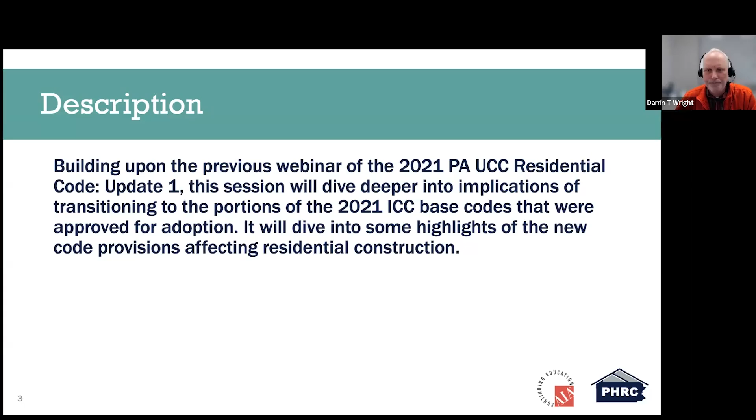These are the basics of the learning objectives: review the most efficient ways to find out which code provisions have changed between 2018 and 2021, discuss noteworthy and substantial code provision changes that will impact design costs and occupant safety, dive deeper into various code changes that will affect residential construction, and understand available resources on best practices that may be impacted by code changes, specifically focusing on building enclosure.

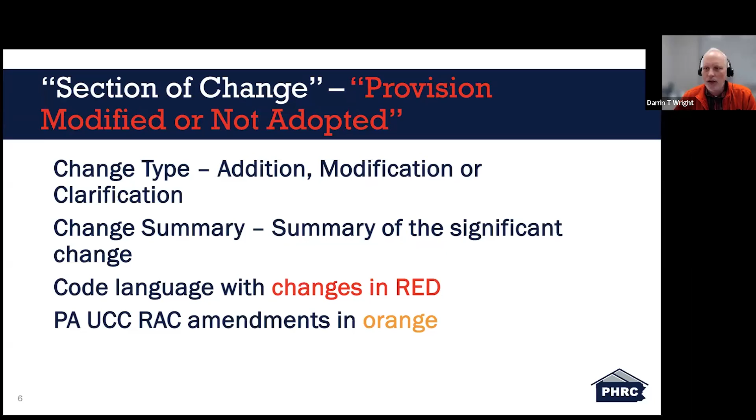And how will these changes be presented? Section of change, there's provisions modified or not adopted. We'll talk about that as we go through the slides. There's three basic change types: addition, modification, or clarification. And within the slides, you'll see a change summary, the summary of the significant change. And there's code language with changes in red. And you're also going to see PA UCC RAC amendments, which we also included when they're applicable to what we're talking about, in orange.

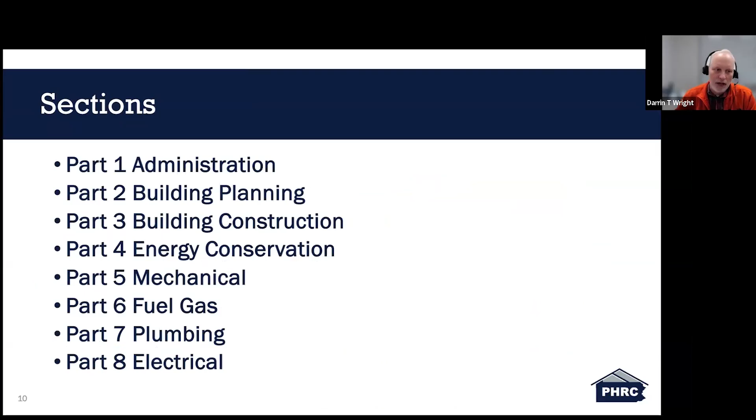Again, today's information is coming directly out of the significant changes to the IRC, the 2021 edition. And additional information is also taken out of the PA UCC 2021 International Code adoption. Sections are broken down into about 8 parts: administration, building planning, building construction, energy conservation, mechanical, fuel gas, plumbing, and electrical. We're going to start with administration.

The first thing in administration we'll talk about is R202, the definition of emergency escape and rescue openings. This change type is a clarification. As you can see, the change summary states definitions for emergency escape and rescue openings and grade floor openings have been updated for clarification and to be consistent with the IBC. What it's saying is the 2021 IRC includes provisions for emergency escape and rescue, which have been updated for consistency with the IBC. Key changes involve clarifying the definition of measurements for the maximum height of emergency escape openings and grade floor openings.

Previously, the measurement for sill height was ambiguous, but the 2021 code clearly specifies that it should be taken to the lowest point of the opening, not necessarily a windowsill. Additionally, the definition of grade floor opening has been revised to better explain the connection to emergency escape and rescue openings. This provision addresses confusion around the reduced opening area for emergency escape at grade and clarifies that the exception applies only to openings close to grade, not those deeper than 44 inches below grade. These updates aim to make the provision more understandable and applicable.

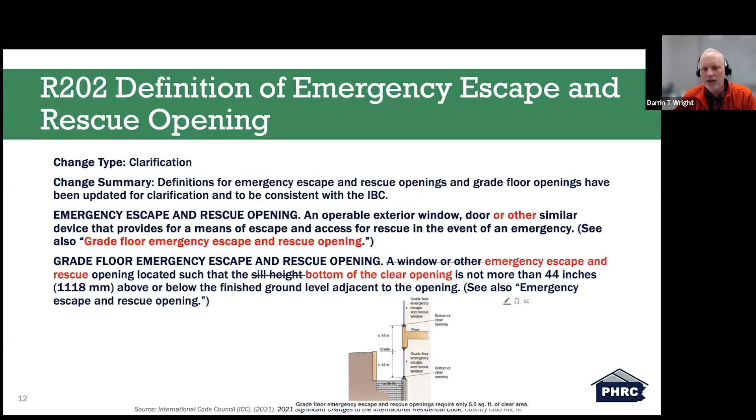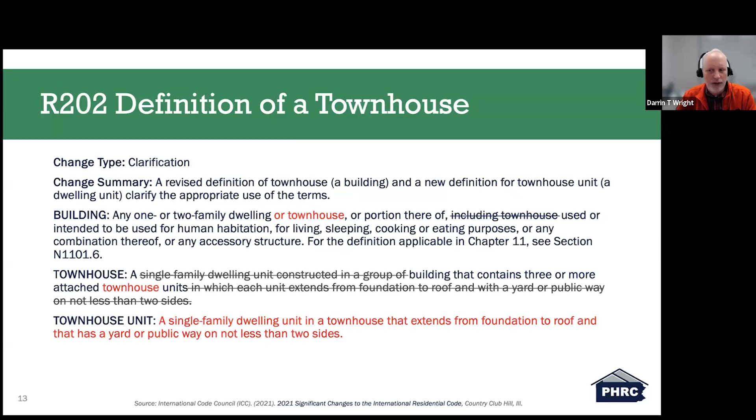And the second slide in administration is R202, the definition of a townhouse. Again, this is a clarification, including all units. The new definition clarifies that a townhouse unit is an individual single-family dwelling within a townhouse building, and a townhouse building consists of 3 or more units. This change ensures consistency across the code, including the townhouse provisions of section R302.2. Additionally, the definition of building has been updated to specify including townhouses along with 1- and 2-family dwellings and accessory structures.

Going into building planning, R301.3 is story heights. And this change type is a clarification. And the change summary states maximum story height for wood wall framing is 13 feet 7 inches when the exception requirements are met. What they're saying is the 2021 IRC revised section R301.3 to address previous confusion

surrounding story height provisions. Historically, the code allowed wood frame buildings to have bearing wall stud heights of up to 10 feet, with exceptions permitting up to 12 feet if an engineered design was provided for wall bracing, except for wind and seismic loads. The 2009 and 15 provisions attempted to address issues with the 16-inch maximum floor framing depth and story height limits, but led to conflicting provisions with wall bracing and masonry walls.

The 2021 update restores the 12-foot bearing wall stud height exception without requiring engineering, as long as compliance with wall bracing requirements in section R602.10 is met. This clarification resolves conflicts with previous story height limits and wall bracing provisions while maintaining engineering requirements for taller walls not complying with certain exceptions in section R602.3.1.

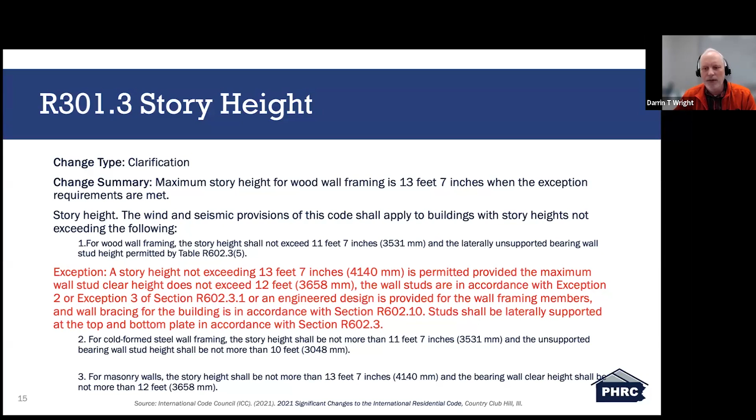The revised code also provides specific snow load limits for taller studs in certain regions, ensuring balance between structural integrity and safety. So this is a 2-slide part. And I'm just going to keep going on from here.

R302.2, this addresses townhouses. This is a modification. The change summary: common walls separating townhouses are permitted to terminate at the inside of the exterior walls where the prescribed fire blocking is provided. Okay, R302.2 has been updated to clarify fire resistance separation requirements for townhouse units. A townhouse unit is defined as a building with 3 or more dwelling units, each called a townhouse unit.

As we talked about earlier, fire separation can use either 2 1-hour rated walls or a common wall with a 1-hour rating and sprinklers, or 2-hour rating without sprinklers. The common wall must extend to the exterior wall sheathing unless an exception applies requiring specific fire blocking materials. The structural independence for separation walls is generally required, but sprinklers can provide an exception.

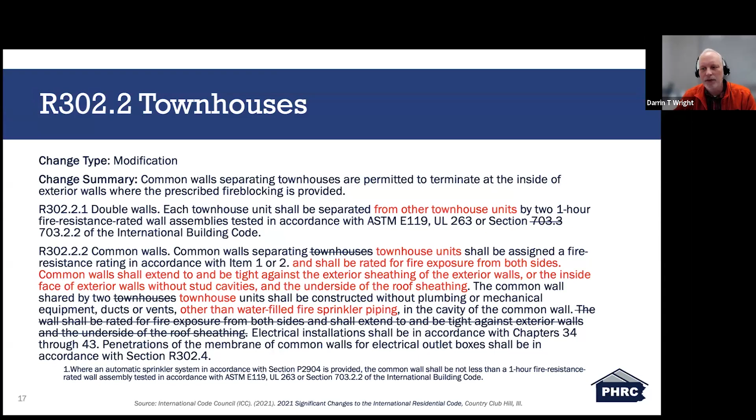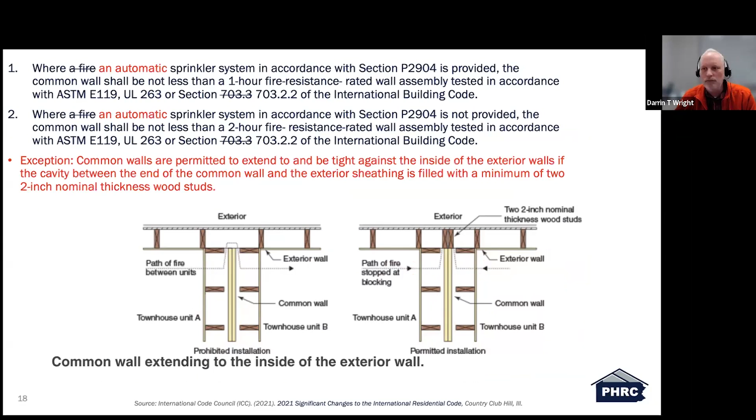R302.3, 2-family dwelling separations is a modification. The prescribed fire resistance rating separation between 2 dwelling units in a single building is not affected by the presence of a lot line between the units. That's what the summary states. The updated code clarifies fire separation requirements for 2-family dwellings, duplexes, regardless of whether a lot line exists between the units.

Only a 1-hour fire-resistant rated wall is required. This resolves previous debates where some jurisdictions treated the lot line as a required 2-hour wall or considered the units as separate single-family dwellings. The change aligns duplex provisions with townhouse rules, ensuring consistency and eliminating confusion.

Okay, R302.5, dwelling garage opening protection. This is a clarification, and there is an addition to the PA UCC RAC change. This change summary: doors between the garage and residence must be self-latching. The IRC requires basic fire protection between an attached garage and the dwelling, typically achieved with 1/2-inch gypsum board on the garage side. While not fire resistant rated, this barrier slows fire spread.

Garage to house doors must meet specific thicknesses or a 20-minute rating, introduced in 2012 to prevent fire, toxic fumes, and carbon monoxide from entering the home. Doors between the garage and home must now include self-closing devices. These devices, like spring-loaded hinges, enhance safety alongside smoke and carbon monoxide alarms.

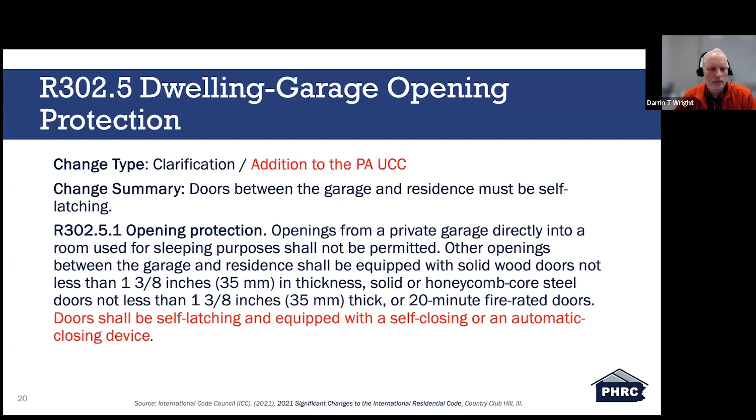R303.1 mechanical ventilation. This change type is a clarification. The summary states a local exhaust system is an acceptable substitute for natural ventilation in kitchens. And again, prior to 2012, the IRC provided an option for 0.35 ACH or whole house mechanical ventilation systems where the prescribed natural ventilation was not provided. The 2012 change eliminated the first option.

The 2021 IRC reintroduces the option for room-based mechanical ventilation systems providing 0.35 air changes per hour, offering flexibility for additions or remodels. It also clarifies that local exhaust systems such as kitchen range hoods can replace natural ventilation in kitchens to effectively remove cooking pollutants. This change emphasizes the need for ventilation directly at the source in kitchens, aligning with Chapter 15 provisions.

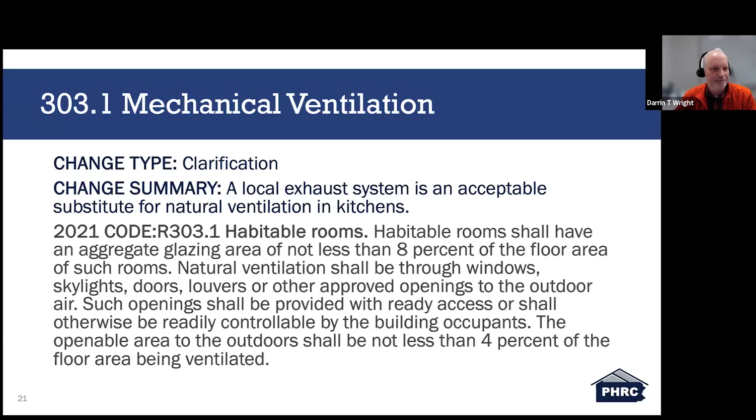R305.1, ceiling height RAC modification. This is a modification. Change summary: the minimum ceiling height is reduced to 6 feet 6 inches under beams spaced at least 36 inches apart. And again, ceiling heights: the intent of the language in the code is to allow beams to project from the ceiling, such that the base of the beam is at least 6 feet 6 inches above the floor. The minimum finish to finish horizontal dimension between the beams is 36 inches.

The exception would not be applicable to basements, as the code already permits a ceiling height reduced to 6 feet 4 inches for beams, girders, ductwork, in basements. The new exception is a result of concern expressed that the size of the beams and girders has increased in recent years with the advent of engineered lumber and open floor plans, and that a ceiling height of 7 feet was not always achievable.

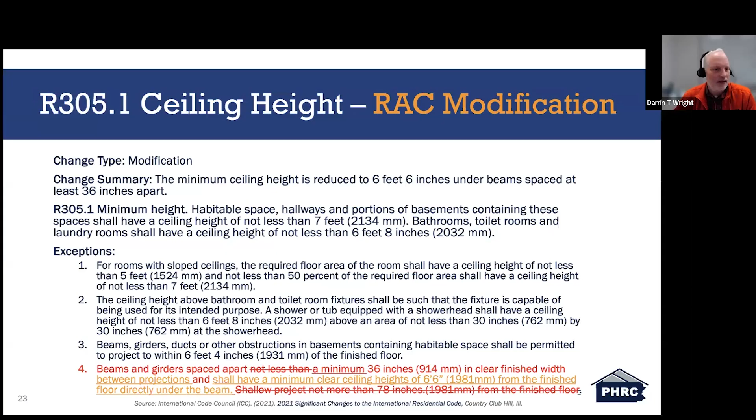The height of 6 feet 6 inches was chosen based on the clear height dimensions of the one required egress door measured from the threshold to the underside of the head stop. The code does not regulate the dimensions of the other doors in the house, but typically they maintain a clear height exceeding 6 feet 6 inches. And we've included a diagram within your slides, your handouts.

R308.4.5, glazing and wet surfaces. This is just a clarification. The language that addresses glazing in walls, enclosures, or fences near tubs, showers, and swimming pools has replaced the word facing with the words adjacent to for those elements related to wet surfaces. Basically, the IRC requires safety glazing near tubs, showers, and swimming pools to reduce the risk of injury from slips and falls on wet surfaces.

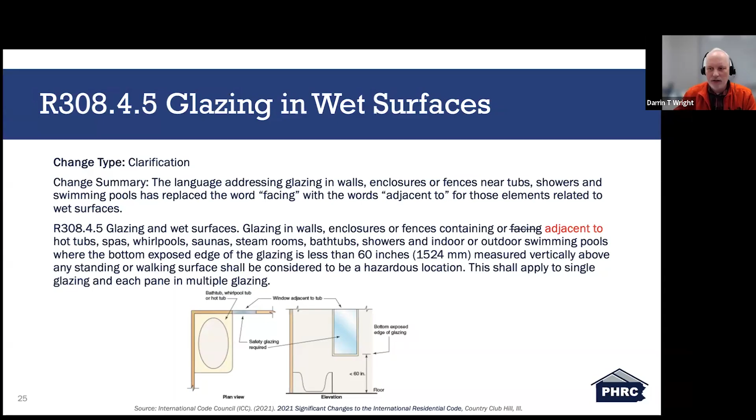Historically, there has been confusion around how to apply the 60-inch horizontal safety zone around these fixtures. Some interpreted the rule to apply only to glazing directly facing the fixture, while others included all glazing within the 60-inch zone, regardless of orientation. To clarify, the updated code now uses the term adjacent to describe glazing near these fixtures, aligning with the language used for glazing near stair landings. This change ensures that safety glazing protects against falls in any direction within the slippery 60-inch zone, providing clear and more consistent guidance.

Moving on to R310.1, emergency escape and rescue opening requirement. This also includes a RAC modification in orange. Again, this change type is a clarification in the code book. The change summary states emergency escape and rescue openings require a clear 36-inch path to a public way. Operation requirements have been clarified. Emergency escape and rescue openings are critical safety features in the IRC, providing secondary exits in emergencies. These openings have been required in sleeping rooms and, since the 2006 code, in all basements and habitable spaces.

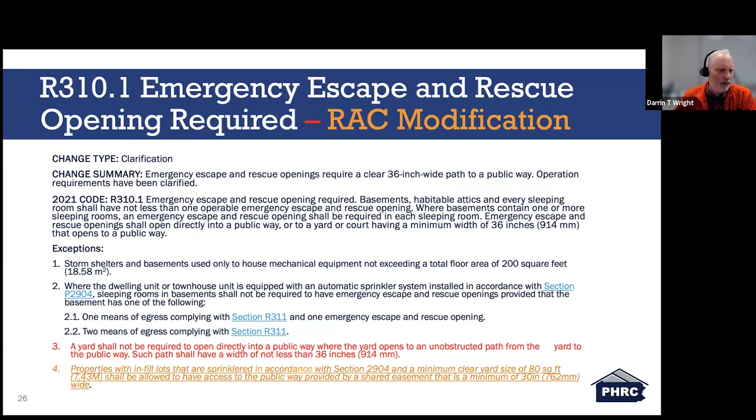The 2021 code introduces a new requirement for a 36-inch wide path from the opening to the public way, ensuring safe travel during an emergency. Additionally, it clarifies that emergency escape windows can use fall prevention devices that meet ASTM F2090 standards, with the release mechanism not exceeding 70 inches above the floor. These changes ensure safe and effective means of escape, particularly for children near high windows. And exception 4 was added through a RAC modification.

R310.2, emergency escape and rescue openings. It's a modification. And the change summary states emergency escape openings under decks, porches, and cantilevers require a path not less than 36 inches wide. Opening dimensions have also been clarified. The 2021 IRC update to section R310.2 mainly involves editorial and organizational changes. The minimum clear opening area of 5.7 square feet and dimensions for emergency escape windows are now clearly separated.

The exception for grade floor openings has been clarified to apply only to openings meeting the new definition of grade floor emergency escape and rescue opening. Additionally, the code now measures window opening height from the floor to the clear opening, eliminating references to sills. Another change allows emergency escape openings under floor cantilevers, requiring a 36-inch minimum path width to the yard, along with the existing 36-inch height requirements for paths under decks and porches.

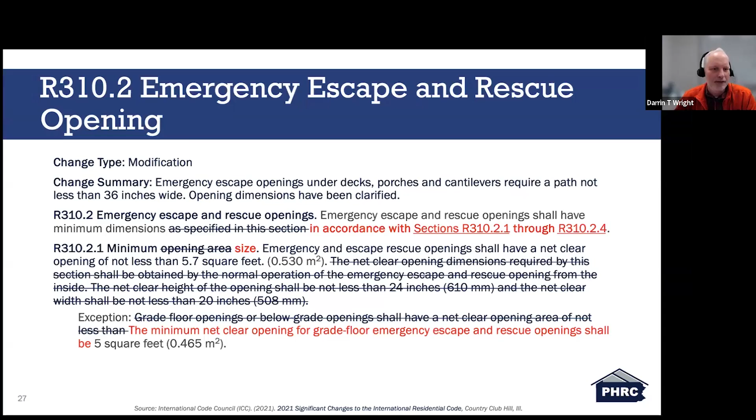R310.5, replacement windows for emergency escape and rescue openings. This is a modification. The change summary states opening dimensions have been reduced for emergency escape and rescue openings for a basement remodel, basement addition, and for a change of occupancy. Again, the 2021 IRC has reorganized and clarified provisions for emergency escape and rescue openings. Section R310.5 now focuses on replacement windows in existing dwellings, requiring that replacement windows be no less safe than the existing ones, and to be the largest standard size window that fits within the existing opening.

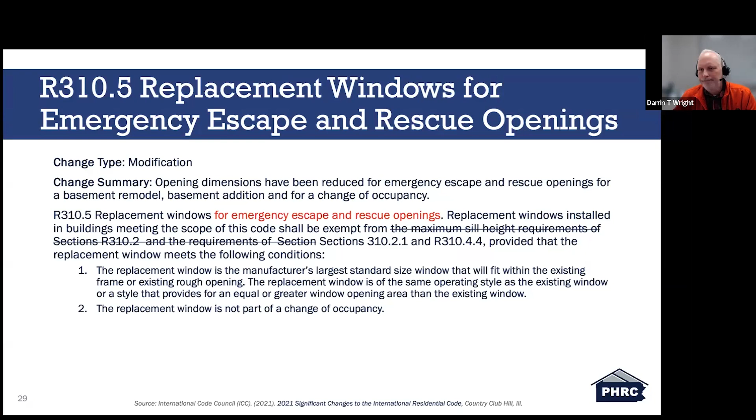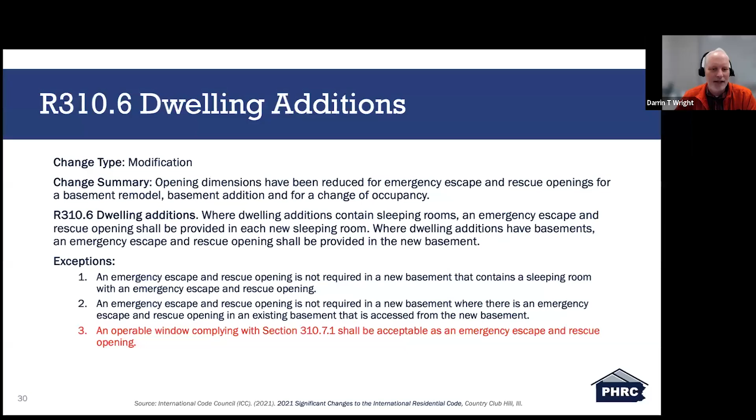R310.6, this is dwelling additions, and this change type is a modification, and the change summary states opening dimensions have been reduced for emergency escape and rescue openings for a basement remodel, basement addition, and for a change of occupancy. R310.6 retains requirements for emergency escape openings in new bedrooms and basements in dwelling additions, with a new exception allowing a reduced window size for certain cases, and really it just adds the exception that an operable window complying with section R310.7.1 shall be acceptable as an emergency escape and rescue opening.

R310.7, alterations or repairs of existing basements. This is a modification. The change summary states opening dimensions have been reduced for emergency escape and rescue openings for a basement remodel, basement addition, and for a change of occupancy. R310.7 clarifies that only new sleeping rooms and existing basements require an emergency escape opening, and a new exception permits smaller window openings for existing windows in these rooms.

R310.7.1, existing emergency escape and rescue openings. This is a modification. And again, the change summary states opening dimensions have been reduced for emergency escape and rescue openings for a basement remodel, basement addition, and for a change of occupancy. And R310.7.1 further addresses reduced window sizes for changes in occupancy, providing flexibility in emergency escape and rescue opening requirements in specific scenarios, aligning with provisions from the IEBC.

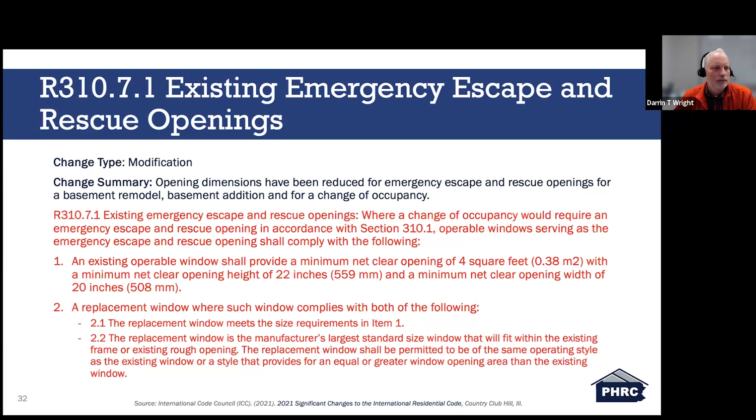R312.2.1, window opening heights. This is just a clarification. The revised language clarifies that measurements for determining the need for fall protection are taken to the bottom of the clear opening of the window. Again, these provisions will apply to windows with openings above 72 inches in height, where the minimum opening height above the finished floor is set at 24 inches unless other protection like an opening control device is provided.

The measurement method for this requirement has changed over time. Initially, the measurements were taken to the window opening, and in the 2015 edition, they were taken to the windowsill. And in the 2021 edition, the reference to the windowsill has been removed, and the measurements are now taken to the bottom of the clear window opening.

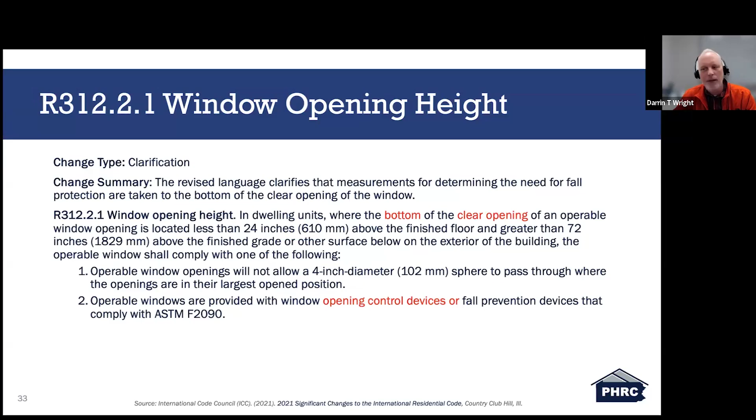R314.3 smoke alarm locations. This is a modification. A new location requirement for smoke alarms addresses high ceilings adjacent to hallways serving the bedrooms. And the 2021 IRC introduces updates to smoke alarm placement requirements to improve safety and reduce nuisance alarms. Smoke alarms are still required in each bedroom, adjacent areas, and on each level, with the exception for open split level designs where a smoke alarm on the upper level serves both levels.

However, in homes with a hallway leading to bedrooms that open into a great room with a higher ceiling, a new requirement mandates an additional smoke alarm on the upper ceiling if it is more than 24 inches above the hall ceiling, ensuring faster detection of the smoke.

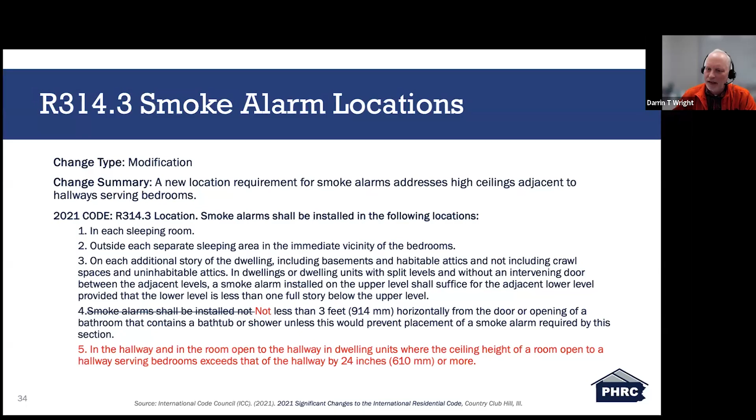The 2015 IRC already addressed nuisance alarms by requiring smoke alarms to be placed a certain distance from cooking appliances and bathrooms. The new code also allows photoelectric smoke alarms to be installed as close as 6 feet from cooking appliances, reducing the risk of false alarms, while smoke alarms listed under the new UL 217 standards are specifically designed to resist nuisance alarms from cooking. And this is just a diagram section drawing of the placement of the new alarm.

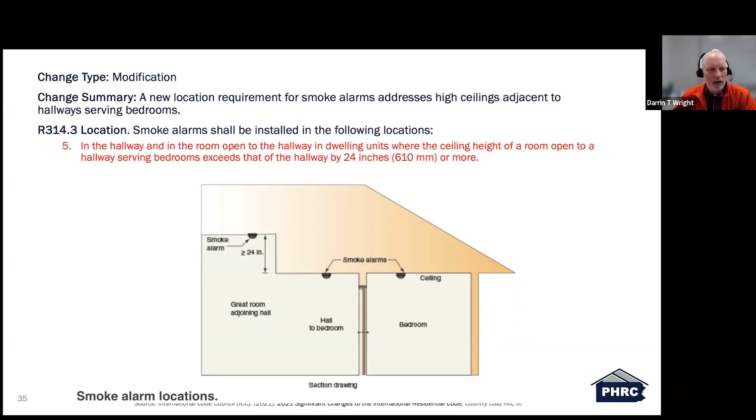R315.2.2 carbon monoxide alarms. This is a modification. Repairs to an existing fuel-fired mechanical system now trigger the retroactive requirements for carbon monoxide alarms. And the 2021 IRC update specifies that alterations or repairs to mechanical systems are exempt from these requirements only if they do not involve fuel-fired equipment. This change ensures that all fuel burning systems such as forced air units or water heaters are subject to the carbon monoxide alarm provisions when altered or repaired.

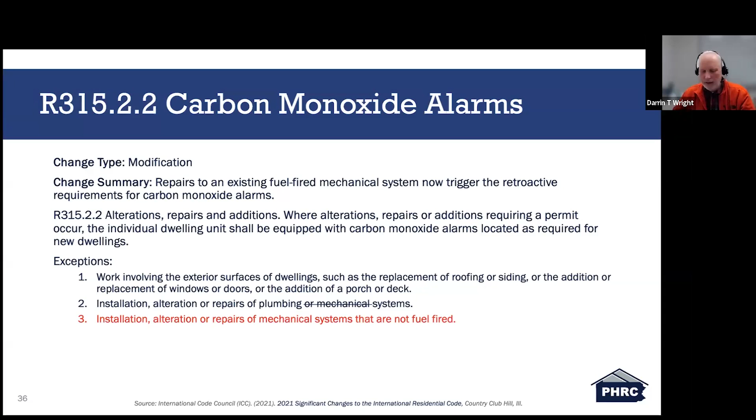R320 accessibility. This change type is a modification, and the change summary states the accessibility provisions for live-work units and owner-occupied lodging houses constructed under the IRC are now clarified. The 2021 IRC update clarifies the definition of live-work units in townhouses and owner-occupied lodging houses with no more than 5 sleeping units, like a bed and breakfast, removing confusing language.

Additionally, the code strengthens the link to the IBC by specifying that the non-residential part of live-work units must be accessible, and where there are 4 or more such units, the dwelling portions must comply with IBC accessibility provisions, though multi-level units without elevators are still exempt, meaning that in most cases, townhouses are exempt from the accessibility requirements.

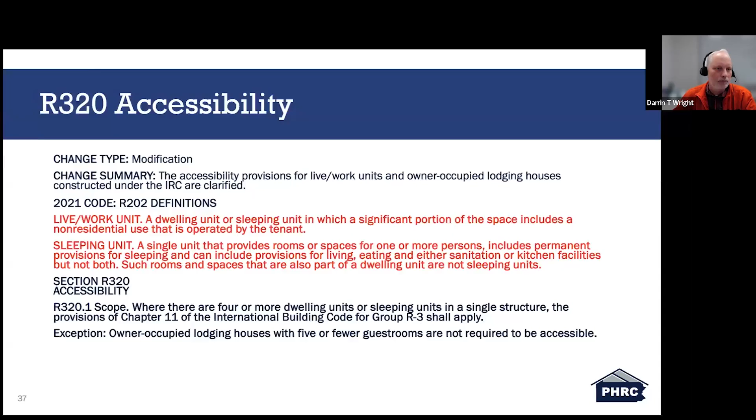R323 storm shelters, change type, this is an addition. Added guidance on the design of storm shelters is placed in section R323. The 2021 IRC introduces provisions aimed at ensuring the safety and effectiveness of residential storm shelters. Failures in shelters that did not meet the ICC 500 standard for storm shelters highlighted the importance of proper design and construction. Shelters placed above ground without accounting for tornado or hurricane loads were particularly prone to failure.

To address this, section R323.1 mandates that storm shelters comply with ICC 500, requiring shelters to be engineered and certified by a registered design professional. The code also adds a definition of storm shelters and requires sealed plans for structural and impact protection systems. An exception allows listed and labeled shelter designs which have undergone third-party review to be submitted without individual design.

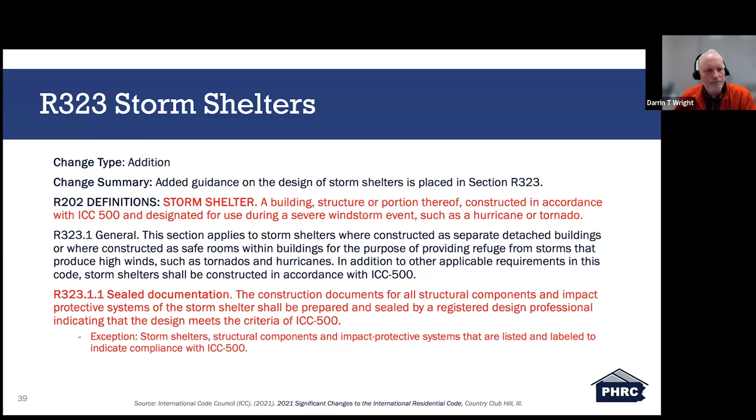Footings below light frame construction. This is a modification. The change summary: tables R403.1, 2 and 3 are revised to more accurately reflect the current practice. Again, the 2021 IRC revises the minimum width and thickness requirements for concrete footings outlined in tables R403.1, 2, and 3, introduced in the 2015 edition.

These changes address discrepancies between the footing widths required by the tables and those suggested by engineering analysis, which found some widths are unnecessarily wide due to conservative assumptions. Key revisions include ground snow loads instead of roof snow load, adjusting the load for above grade concrete or masonry walls from 100 PSF to 55 PSF, and applying more accurate load combinations for roof, snow, and floor live loads.

Additionally, the revised calculations clarify the use of tributary widths for footing design, eliminating the confusion caused by previous guidelines that stated footing widths for wider buildings. These updates generally align with historic practices while ensuring technical accuracy. A new structure for footnotes further clarifies how to adjust footing widths and depths based on building width, especially for buildings wider than 32 feet.

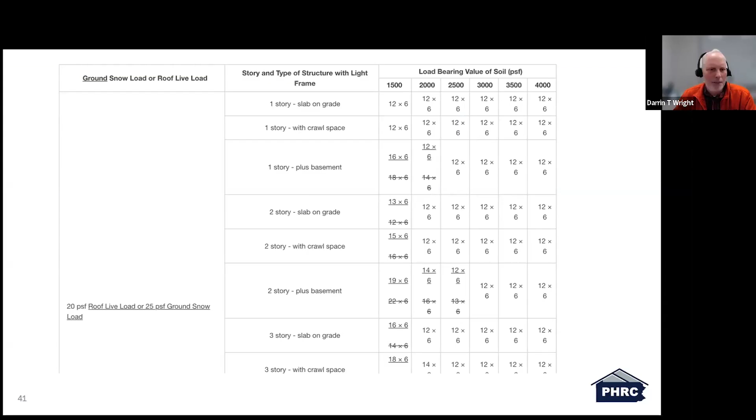And if you go to the new code book, you will see there's a lot of strikeouts, and most of the footer widths are narrower. Not by a lot, by a few inches.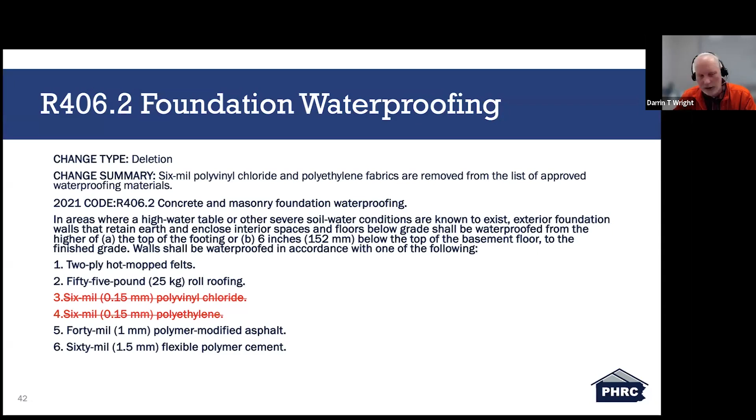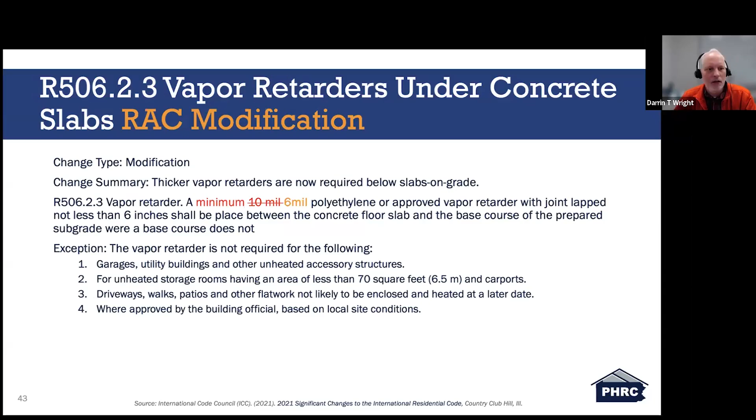R506.2.3, vapor retarders under concrete slabs. This actually is a RAC modification I wanted to include. Thicker vapor retarders are now required below slabs. That's the change summary in the code book. And their code change was moving the minimum thickness to 10 mil, but the RAC modification canceled that 10 mil modification and kept it at 6 mil polyethylene for approved vapor retarder. So you could still use 6 mil under slabs, even though in the IRC book it says 10 mil.

R507 deck loads. This change type is a modification. The change summary: deck design is now based on live and snow loads. The 2021 IRC updates deck design provisions to account for areas with higher snow loads. The PHRC is going to be having a webinar in January. This webinar will be presented by Chris Hine, and he will be presenting on deck design and modification.

So previously, all decks were designed with a uniform 40 PSF live and a 10 PSF dead load. However, the new code requires decks to be designed to either 40 PSF live load or a ground snow load, whichever is higher based on your area or jurisdiction. This ensures that deck structures are adequately designed to handle local snow loads. And again, there are now 4 tables, the 40 PSF tables, and then there's a 50, 60, and 70 table as well.

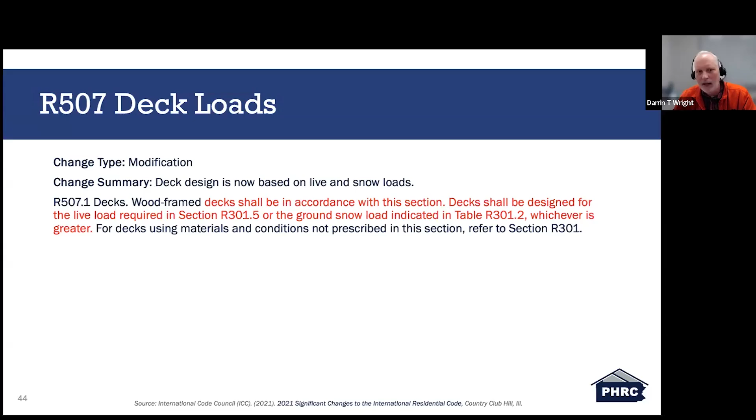R507.3 deck footings, this is a modification. Again, clarifications are made for freestanding deck footing exceptions, and a tributary area of 5 square feet is added to the deck footing size table. The 2021 IRC clarifies footing exceptions for freestanding decks. Joists supported directly on grade no longer require footings, and small decks low to the ground can use concrete piers to support deck joists without the need for beams or posts. These decks are limited to 200 square feet and a height of 20 inches above grade.

Table R507.3.1 now offers a smaller minimum footing size for decks. This change makes footing requirements more appropriate for smaller areas like stairs or landings and allows for precast concrete solutions. Updated footnotes clarify that footings must be large enough for full post bearing and specify that a minimum footing thickness applies to plain concrete, with reinforced footings potentially being allowed based on calculations.

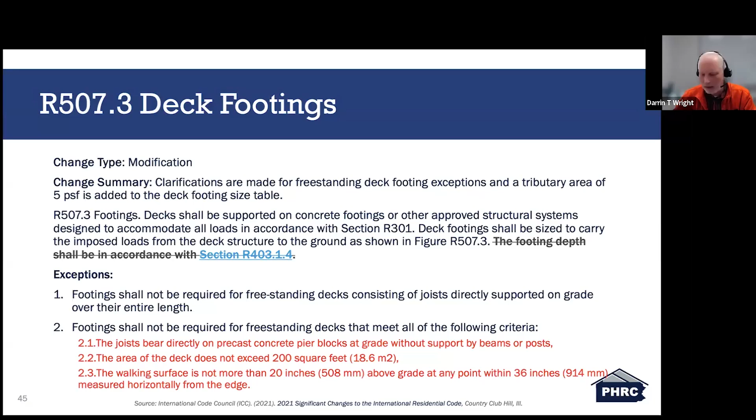R507.4 deck posts. This is a modification. The change summary states the deck post height table is expanded by adding the tributary area supported by a post and the wood species for determination of a maximum post height. And again, R507.4 maximum deck post height has been significantly expanded in the 2021 IRC to accommodate a broader range of post heights by considering the tributary area supported by the post for smaller decks, porches, and landings.

This expansion allows 4x4 and 4x6 posts to support greater heights, with the maximum post height now reaching 14 feet for posts with an 8x8 minimum nominal dimension, or a maximum tributary area of 20 square feet. For decks with a 40 PSF live load, certain wood species such as southern pine, Douglas fir, hem fir, and spruce pine fir with 6x6 minimum dimensions can support the 14-foot height. The table accounts for 50, 60, and 70 PSF ground snow loads and standard wood assumptions.

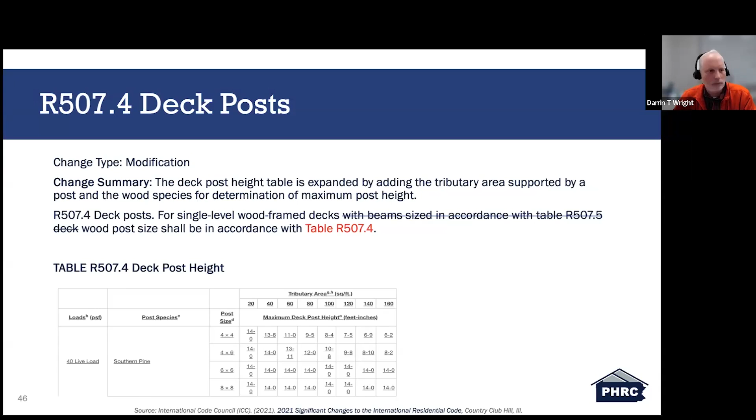R507.5 deck beams. This is a modification. The change summary states the deck beam span table is split into multiple tables, providing spans for a given deck, live, or snow loads, single and multiply spans, as well as options for support of the cantilever decks. Cantilever deck joists are listed.

Okay, moving on, 507.5 deck beams. Change type is a modification. The change summary states the deck beam span table is split into multiple tables, providing spans for a given deck, live, or snow loads, single and multiply spans, as well as options for support of the cantilever deck joists are listed.

And again, to address the snow loads greater than 40 PSF, the 21 IRC updates prescriptive deck provisions with revised span tables. The table R507.5 deck beam span length is replaced by 4 new tables, R507.5(1) through (4), that account for 50, 60, and 70 PSF ground snow load conditions in addition to the traditional 40 PSF. These tables now list single ply spans for all wood species, with multiply span options still available for each species.

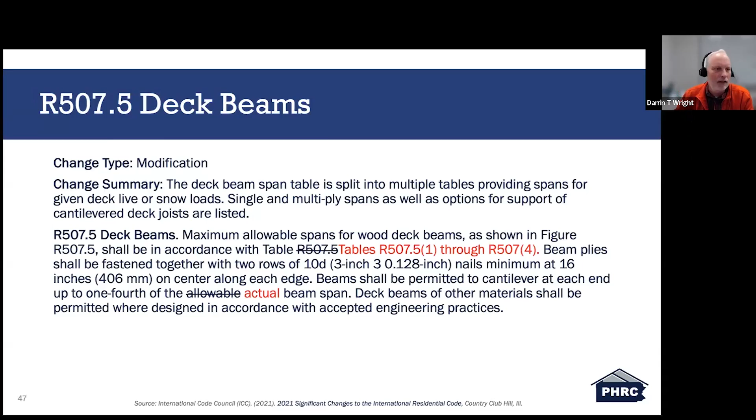And several examples are provided to illustrate the effective joist spans in the 2021 IRC. And they are included in your handouts as well as here, but I'm not going to go over these.

I'm going to move on to R507.6 deck joists. This change type is a modification. Change summary: deck joist options are added for decks with large ground snow loads. Cantilever spans are now specifically based on maximum joist span. And the 2021 IRC updates table 507.6, which previously caused confusion regarding cantilever lengths for deck joists.

And the 2018 IRC cantilever limits were based on joist spacing and required designers to check both the maximum cantilever lengths and the limit of 1/4 of the joist span, which was often unclear. The new table uses backspan to define the actual joist span, making the maximum cantilever length more intuitive.

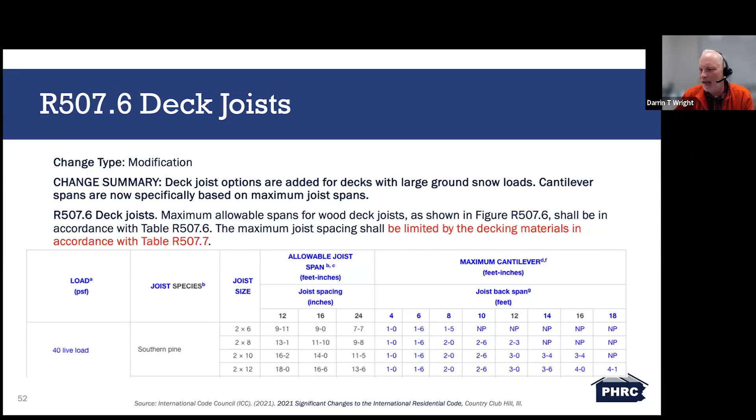Moving on to R507.7, the decking. This is a modification. The wood decking table is updated to show maximum on-center joist spacing for single and multi-span configurations. The 2021 IRC updates table 507.7, which addresses the maximum joist span for decking, particularly for 2-inch nominal wood decking material.

The previous 2018 IRC table was conservative, recommending a maximum span of 16 inches, whereas the American Lumber Standard Committee decking policy allows for a span of up to 24 inches for certain 2-inch nominal materials. The updated table retains a conservative baseline but offers greater flexibility for design and manufacturers by considering whether decking spans 2 or more joists.

In a multi-span condition where decking spans across multiple joists, the allowable joist spacing may increase, especially for thin and flexible decking materials. Additionally, footnote B provides flexibility for 5/4 thick wood decking, allowing a lumber grading agency or a third-party inspector to determine the maximum joist span for specific decking materials.

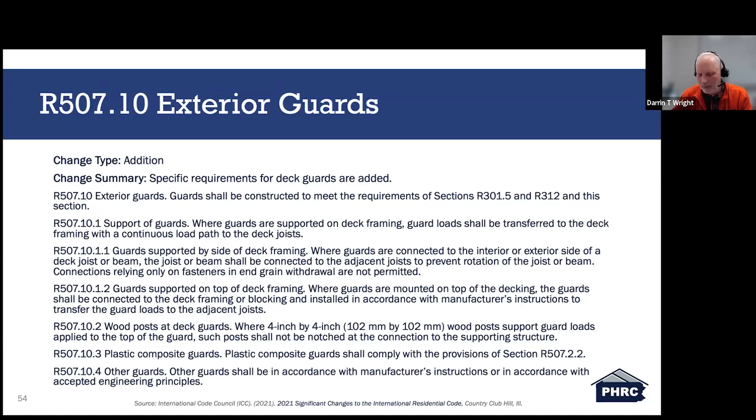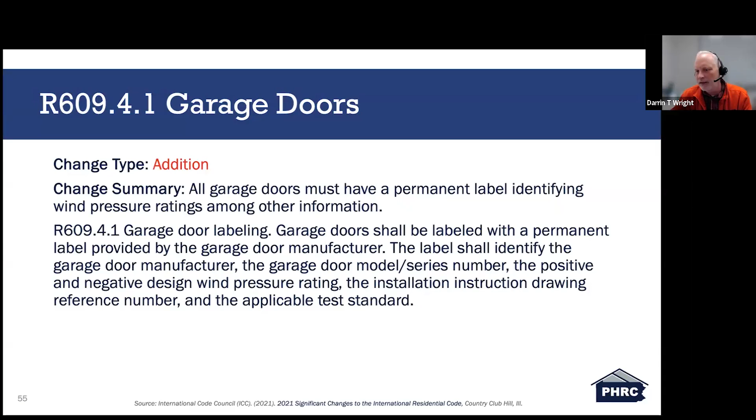Moving out of decking into R609.4.1, garage doors. This change type is an addition, and the change summary states all garage doors must have a permanent label identifying wind pressure ratings, among other information. The 2018 IRC did not require garage doors to include a permanent label. The 2021 IRC introduces section R609.4.1, which mandates that garage doors must have a permanent label displaying the manufacturer, model, series number, and the performance characteristics.

Moving on to R702.7, we got vapor retarders. This change type is a modification. The change summary states the vapor retarder section is reorganized for clarity and ease of use. The 2021 IRC includes revised provisions for vapor retarders and wall assemblies to prevent water accumulation and moisture-related issues.

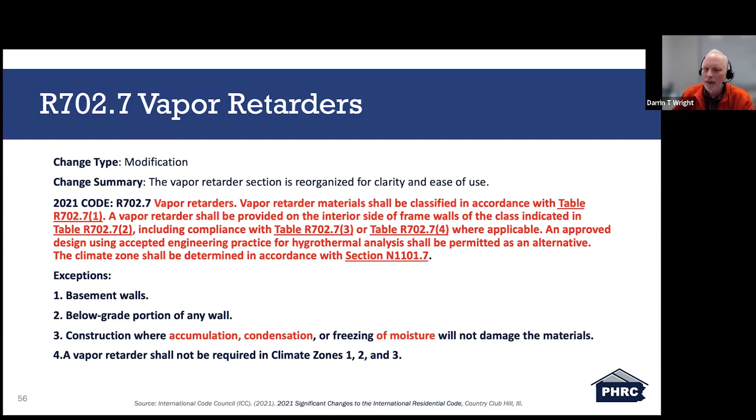Walls must have a water-resistive barrier behind the exterior cladding to drain any water that enters, and a vapor retarder on the interior side to resist condensation from the building interior. Historically, vapor retarders were required on the warm-in-winter side of exterior walls, but the research has shown that this is unnecessary in warmer climates. Therefore, the IRC now specifies that a vapor retarder be installed on the interior side of a building thermal envelope in specific climate zones.

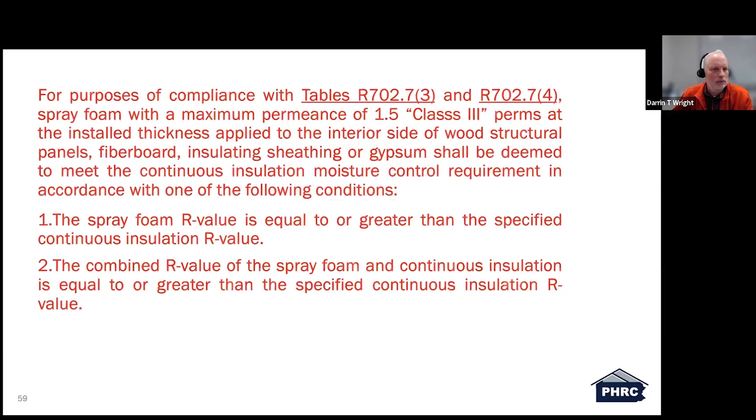R703.2, water-resistive barriers. RAC modification. Change type is a modification. Change summary, RAC modification language similar to the 2024 IRC. So basically, Pennsylvania is going more towards the 2024 IRC than the 2021.

R703.2 water-resistive barriers. This is a RAC modification. And again, this change type is a modification. The RAC modification language is very similar to the 2024 IRC. And in the 2024 IRC, you can see here in orange where the water-resistive barrier also functions as a component of the continuous air barrier. The water-resistive barrier shall be installed as an air barrier in accordance with Section N1102.5.1.1.

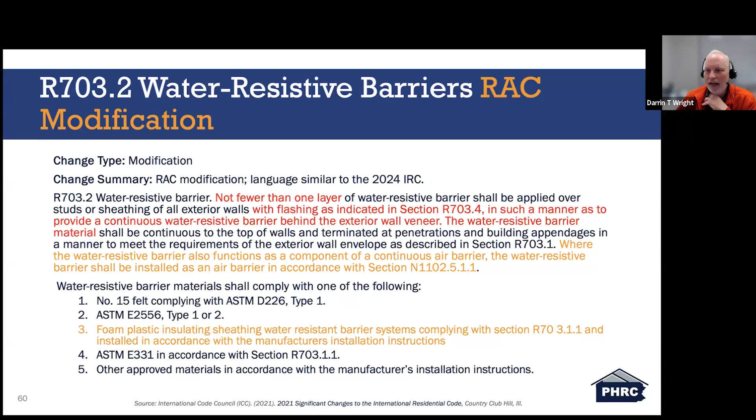And again, there's the addition of number 3, which is not included in the 2021 code. Foam plastic insulating sheathing water-resistive barrier systems complying with Section R703.1.1 and installed in accordance with the manufacturer's installation instructions. That is now allowed.

R704 soffits, RAC modification. This change type is an addition. Requirements for soffit material installation are expanded. The 2021 IRC introduces Section 704 to clarify material installation requirements for soffits, addressing their wind performance and distinguishing them from exterior wall covering provisions in Section 703. This update builds on provisions from the 2018 IRC and includes new prescriptive alternatives for wood structural panel soffits, ensuring compliance with wind pressure design criteria in the IRC and ASCE 7.

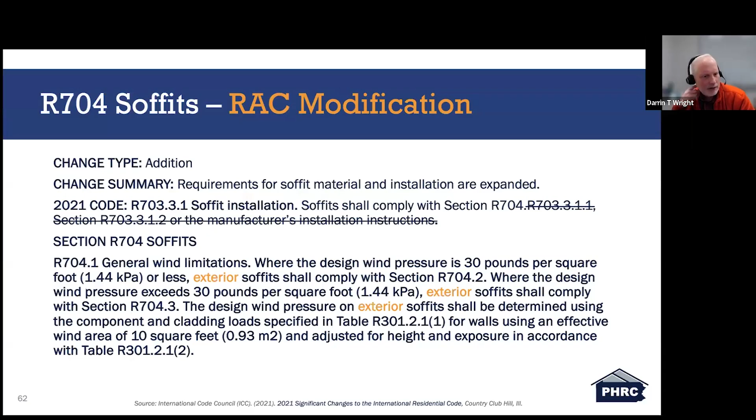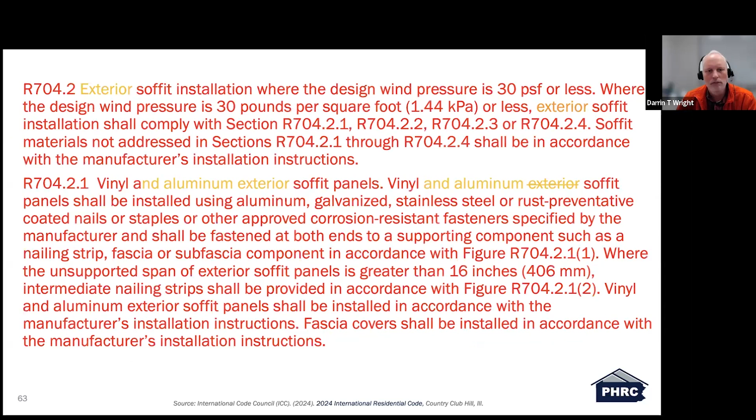R802 wood roof framing. This also includes a RAC modification. The change type in the IRC is a modification. The change summary states revised provisions clarify ridge beam and ceiling joist requirements. The 2021 IRC clarifies requirements for connecting rafters and ceiling joists to prevent rafter thrust, where roof loads push exterior bearing walls outward. Section R802.5 emphasizes the importance of a continuous tie across the lower portion of rafters achieved using ceiling joists or rafter ties to maintain the structural stability of the roof triangle.

When ceiling joists or rafter ties are absent, or if ceiling joists are positioned higher in the attic or perpendicular to the rafters, ties must comply with Section R802.5.2 to resist thrust forces. For scenarios like cathedral ceilings where ceiling joists are missing, the code requires either a properly designed tie or the installation of a ridge beam engineered to support rafters at the peak. These provisions ensure structural integrity and prevent outward wall movement under roof loads. And you can see the RAC modification is just the addition of girders at the end of Section R802.3.

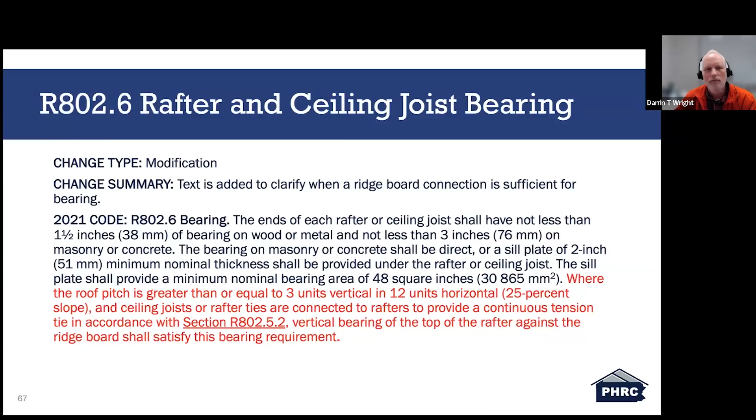Moving on into energy, mechanical, electrical, and plumbing significant changes. R1102.4.6, electrical and communication outlet boxes. This is an addition. The change summary states electrical and communication outlet boxes installed in the building thermal envelope must be sealed, tested, and marked for compliance with referenced standards. And the new section R1102.4.6 introduces specific air leakage requirements for electrical and communication outlet boxes to enhance the efficiency of the building thermal envelope.

Previous table R1102.4.1.1 allowed either an air barrier behind the boxes or on-site air sealing. The updated section mandates the use of air-sealed boxes that meet prescribed standards and test criteria, eliminating the reliance on field-applied sealing methods like insulation or caulk. These air-sealed boxes must be tested, marked for compliance, and installed per the manufacturer's instructions, ensuring effective air sealing.

If your air barrier is on the exterior wall, if you're using the sheathing method on the exterior of your building as your air barrier, how this provision applies might be a question to move on to your local code official, whether you still need this interior box to be air sealed, especially if you can demonstrate that your air sealing barrier is on the exterior of your building if you're using a ZIP system as your air barrier.

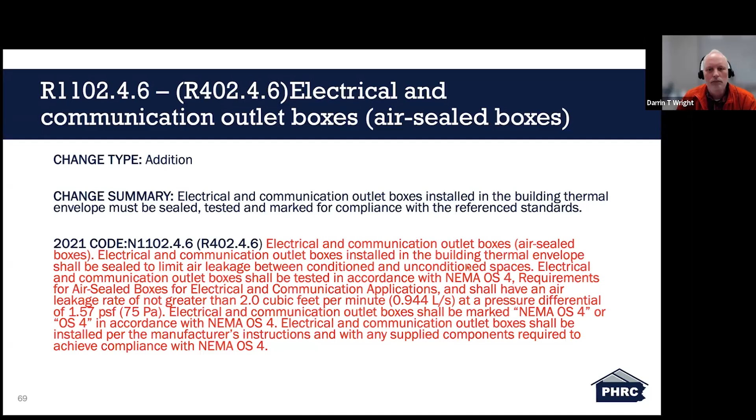Moving on, N1104.1, lighting. This is not adopted per RAC report. N1106 and N1106.2, energy rating index. This is a modification. And the change summary states that the new table N1106.2 lists the requirements associated with the energy rating index compliance path. ERI values have been lowered to improve energy efficiency.

And N1106 outlines the ERI compliance path included in the 2015 code as a method to demonstrate energy code compliance. The ERI is a scoring system benchmarked at 100, representing the energy use of the 2006 IECC. Obviously, 100 is high and poor. Closer to 0 is the better representation. And 0 represents a net zero energy building, basically.

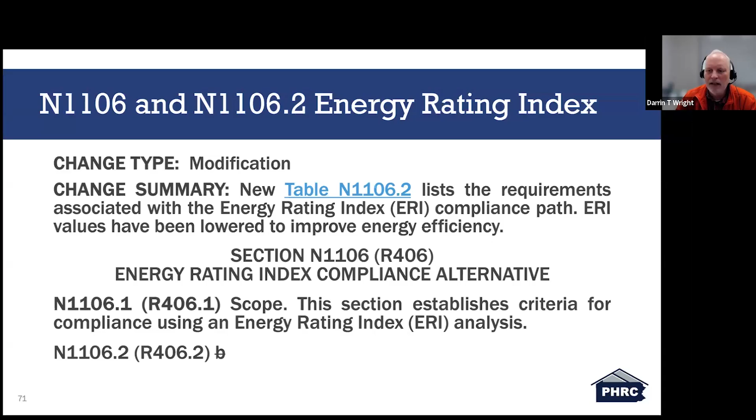The 2021 code restructures this section by clarifying requirements, eliminates the confusing mandatory and prescriptive labels, and consolidates all ERI related requirements into section N1106. New tables provide detailed provisions and updated ERI target scores, restoring the more stringent benchmarks from the 2015 IECC. Additionally, new provisions in section N1101.13.5 require an ERI value at least 5% lower than the 2021 targets, making the ERI path significantly more rigorous than other compliance methods. These changes aim to enhance clarity and drive improved energy efficiency in residential buildings.

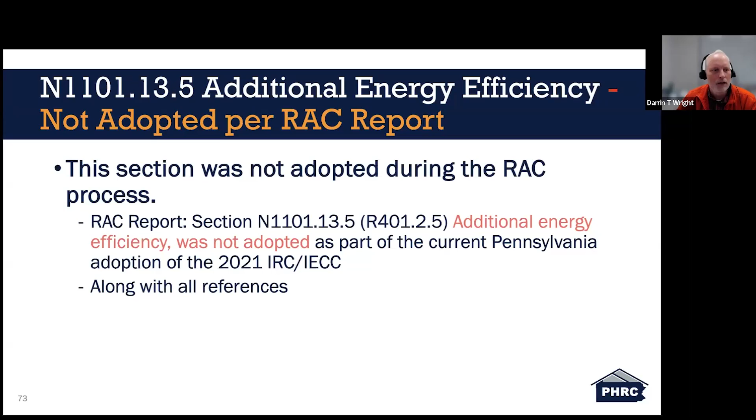N1101.13.5, additional energy efficiencies. This was not adopted by the RAC report. N1108.1, scope. This is a RAC modification. Again, the RAC modification is you're striking out "in accordance with section N1101.13.5" because the RAC is not adopting that modification.

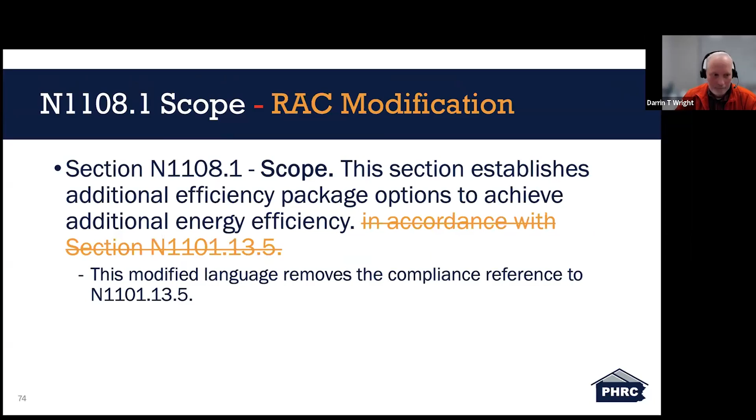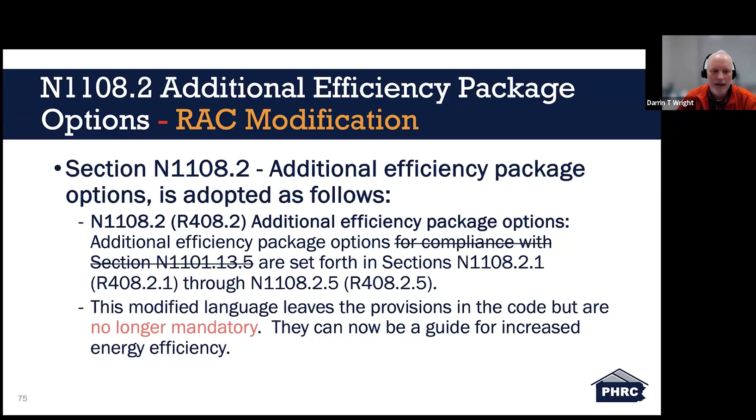Again, N1108.2, additional energy efficiency package options. This is a RAC modification again. This modified language leaves the provisions in the code, but they are no longer mandatory. They can now be a guide for increased energy efficiencies.

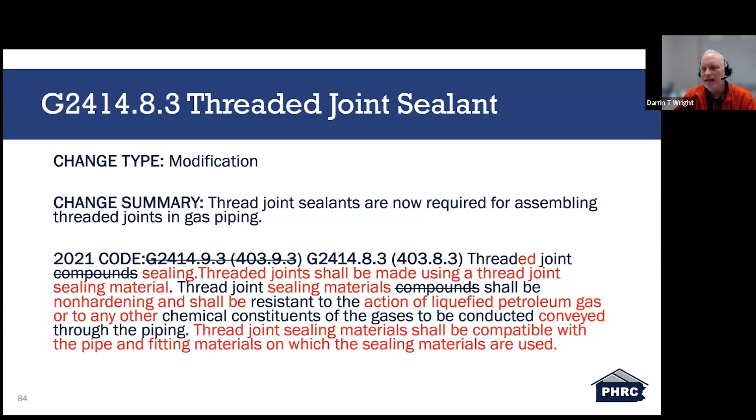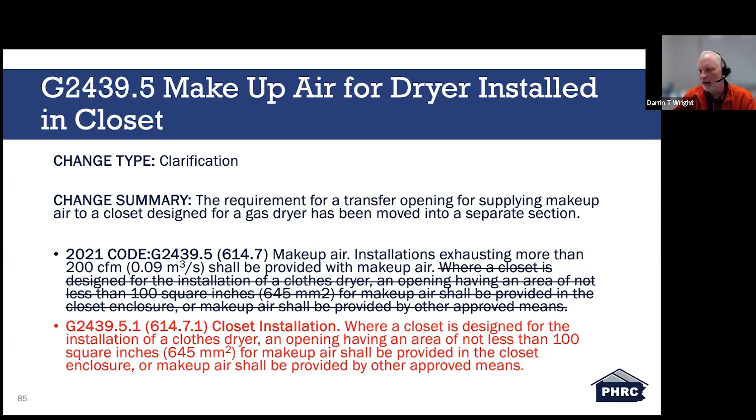This ensures that dryers are not starved for air and prevents negative pressure in the closet. The opening requirement in section G2439.5.1 now applies to all dryers, regardless of exhaust rate, ensuring ventilation.

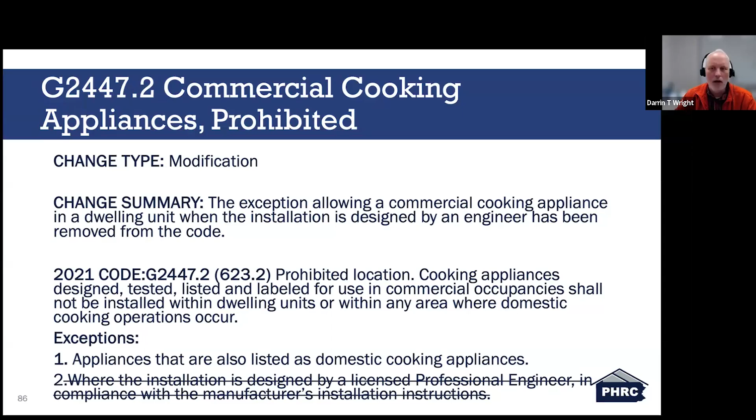G2447.2, commercial cooking appliances are now prohibited. Previously, you could use commercial grade appliances if, as you can see here, the installation was designed by a licensed professional engineer in compliance with the manufacturer's instructions. That is now completely struck from the code. Only residential appliances are now approved.

Plumbing, P2503.5.1, drain, waste, and vent systems testing. This is a modification. The head pressure for a water test of drain, waste, and vent systems has increased from 5 feet to 10 feet. Air vacuum testing is now permitted for plastic piping in DWV, drain, waste, and vent systems.

The 2021 IRC revisits the head pressure requirements for testing drain, waste, and vent systems with water. Previously reduced to 5 feet in the 2015 edition, the head pressure is now restored to 10 feet. The 2021 revision aligns with the International Plumbing Code, IPC, and maintains consistency with the air pressure testing, which remained unchanged in the 2015 code. The test involves filling the DWV system with a water height of up to 10 feet above the piping being tested and inspecting for leaks over 15 minutes.

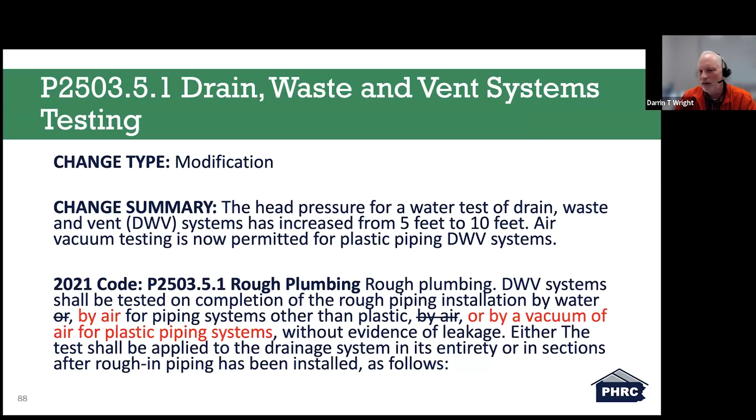An additional change in the 2021 code allows for vacuum air testing for plastic DWV systems, providing an alternative method for testing in cold temperatures where water testing may be difficult. This vacuum test eliminates safety concerns associated with air pressure tests and is gaining use in the industry.

P2708.4, P2713.3, shower and bathtub control valves. This is just a clarification. The code now addresses field adjustments and access to shower control valves. Lower flow shower heads need to be compatible with a shower control mixing valve. The IRC now requires a shower control valve be rated for the flow rate of the installed shower head to ensure scald and thermal shock protection.

Previously, shower heads were limited to a maximum flow rate of 2.5 gallons per minute, and the mixing valves were designed to safely operate at that flow. However, low flow shower heads, which may not provide sufficient motive power for the valve to adjust during temperature changes, could compromise safety as a result. So the code update maintains that the mixing valves be compatible with the specific flow rate of the shower head to prevent temperature shock.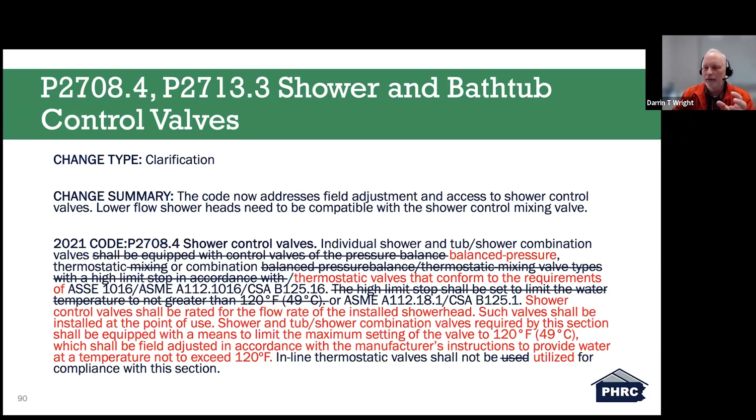Additionally, for bathtubs and whirlpool bathtubs, the code requires access to water temperature limiting devices for field adjustment unless they are non-adjustable. So now the flow rate of the shower head has to match the flow rate of the valve. P2905.3, length of hot water piping to fixtures. This was not adopted by the RAC.

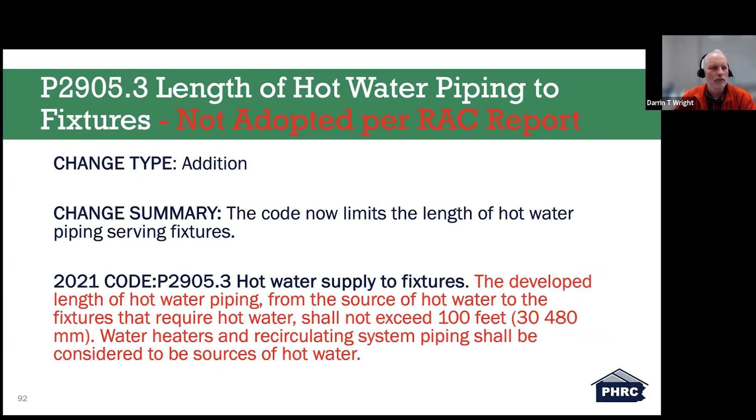Electrical, E3601.8, emergency service disconnect. This is an addition. An emergency service disconnect is required in a readily accessible outdoor location. Again, the 2021 code introduces a new requirement for an emergency disconnect to be located at a readily accessible point outside of the building. This emergency disconnect is intended to allow first responders to quickly and safely cut off power in emergency situations, especially when the service disconnect is located inside, such as in a basement or garage, which can be difficult or unsafe to access.

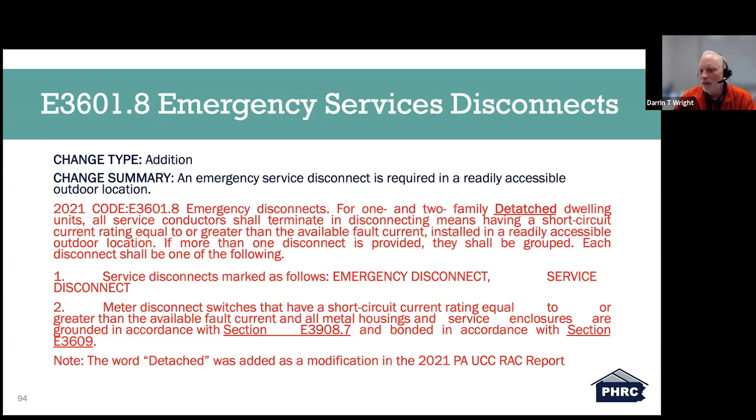E3606.5, service surge protective devices. This is an addition. A surge protection device is now required at all service terminals. And the 2021 code now requires the installation of a surge protective device integral to or immediately adjacent to the service equipment, including for replacement service equipment.

This change addresses the growing concern over the impact of electrical surges on sensitive electronics, which can damage components or cause data loss. The surge protective device must be either a Type 1 or Type 2 device. The Type 1 devices are typically installed on the supply side before the main service disconnect, though they can also be used downstream, while Type 2 devices are restricted to the load side of the main disconnect.

E3703.4, bathroom branch circuits. This is a clarification. Only the required bathroom receptacle outlets or those serving a countertop need to be on a dedicated 20 amp circuit. This updated provision in E3703 clarifies the requirements for bathroom branch circuits. A minimum of one 20 amp circuit is required to serve bathroom receptacle outlets, specifically those located within 36 inches of a lavatory basin as per section

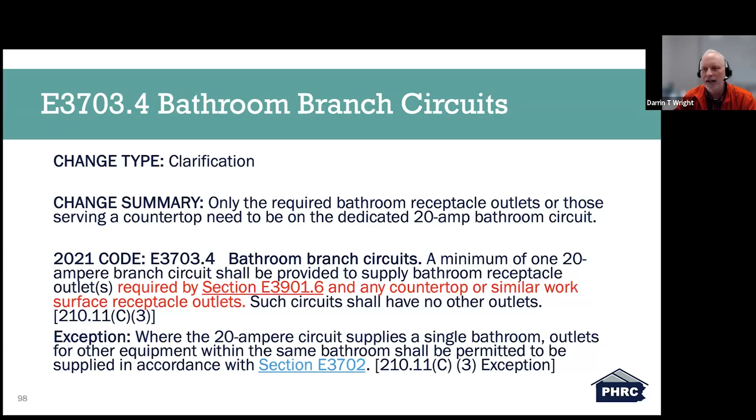E3703.5, garage branch circuits. This is a modification. Only the required receptacle outlets must be on the 20 amp dedicated circuit for garages. And E3703 outlines the minimum requirements for branch circuits in a dwelling unit, specifying when separate circuits are needed. For example, separate 20 amp circuits are required for kitchen, dining areas, bathrooms, laundry rooms, as well as separate heating equipment. The 2015 IRC introduced a separate circuit requirement for garages, initially permitting either a 15 or 20 amp circuit.

In the 2018 IRC, this was changed to a 20 amp circuit dedicated solely to the garage receptacle outlets, with an exception for exterior receptacles with ready access. The 2021 code further clarifies that only the required receptacle outlets, such as those in each vehicle bay, need to be supplied by this dedicated 20 amp circuit.

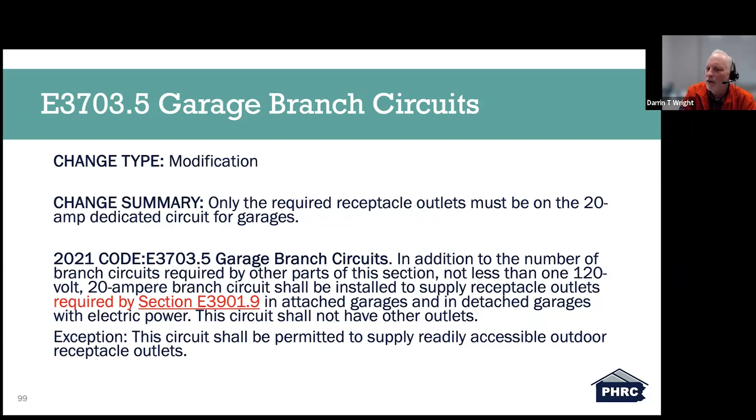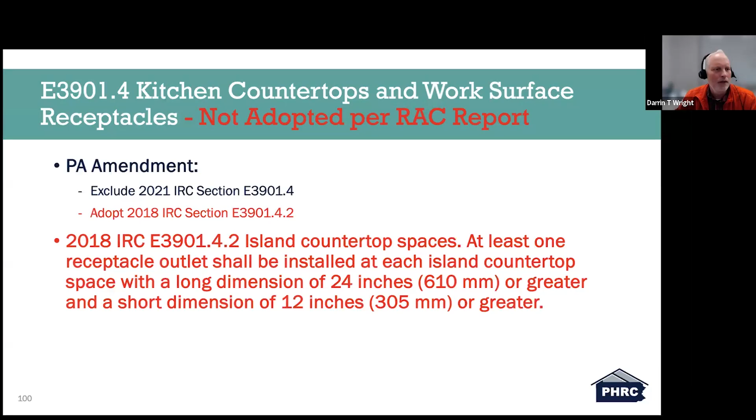Basically, if you have a 2-car garage, each garage bay must have a 20 amp outlet dedicated to this circuit. If you have a 3-car garage, obviously you'll need 3. Optional outlets like those for a garage door opener may now be on a general purpose 15 or 20 amp circuit. Kitchen countertops and work surface receptacles. This has been not accepted by the RAC report, so we don't need to worry about that.

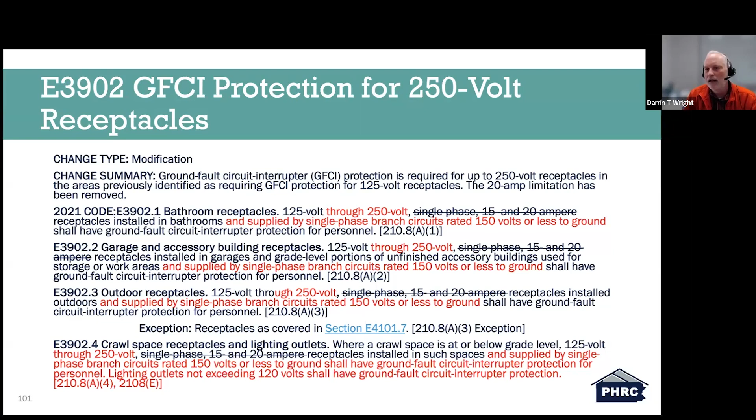E3902, GFCI protection for 250 volt receptacles. This is a modification. Change summary: ground fault circuit interrupter protection is required for up to 250 volt receptacles in the areas previously identified as requiring GFCI protection for 125 volt receptacles. The 20 amp limitation has been removed. So basically anywhere that there's a requirement for a GFCI on a 20 amp receptacle, if you additionally have a receptacle up to 250 volts, not caring about amperage, that now has to have GFCI protection.

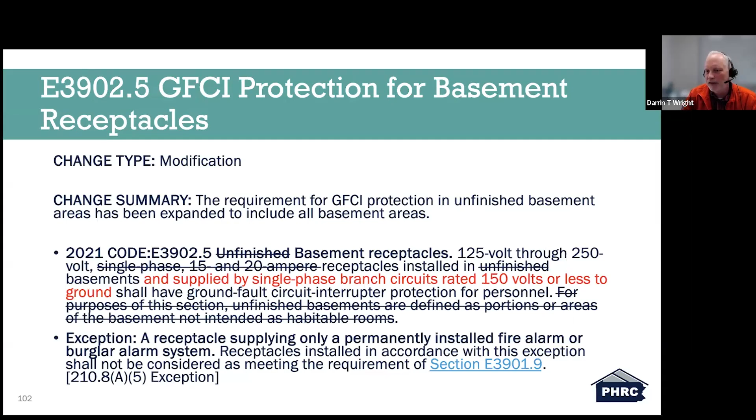E3902.5, GFCI protection for basement receptacles. Again, this is a modification. The requirement for GFCI protection in unfinished basement areas has been expanded to include all basement areas. So now any outlet in your basement has to have GFCI protection. This change addresses concerns about conductive floor surfaces such as concrete or ceramic tile in these areas that could pose a shock hazard.

E3902.10, GFCI protection for indoor damp and wet locations. This is an addition. Change summary states GFCI protection is now required for indoor damp and wet locations not included in other specific locations requiring GFCI protection. The new language broadens the GFCI requirements to encompass additional damp and wet locations, like mudrooms or outdoor accesses or pet bathing or grooming areas.

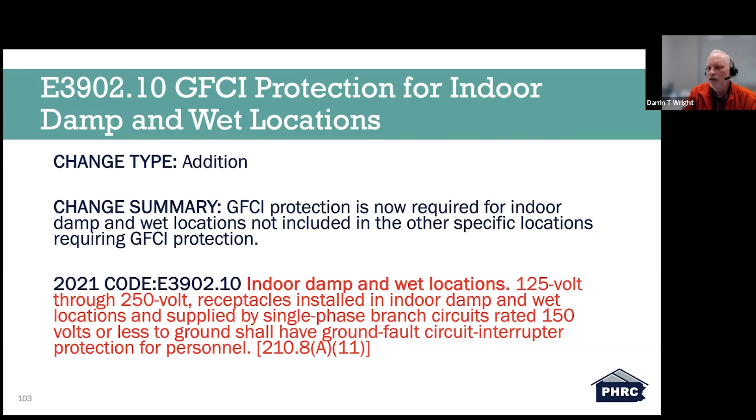Now this expands the safety measure. It also presents interpretation issues for building code officials who must assess the potential shock hazards. So this might be different based on how it's being interpreted by your local building official. And that pretty much ends our portion of the PA UCC Residential Code Update Part 2.